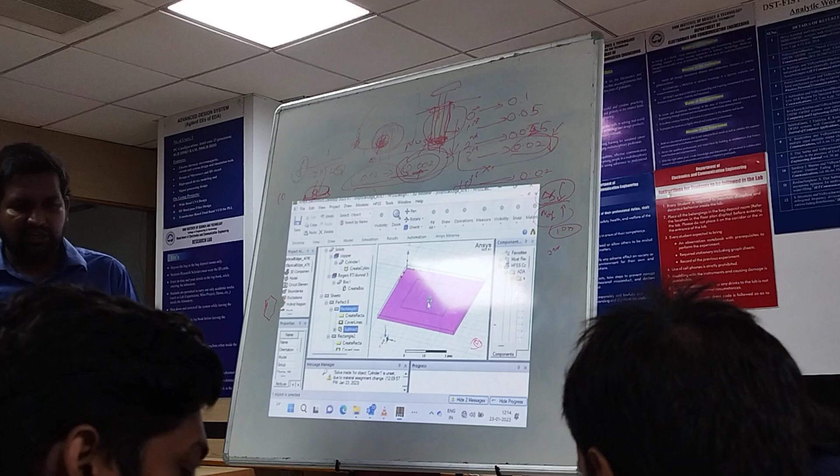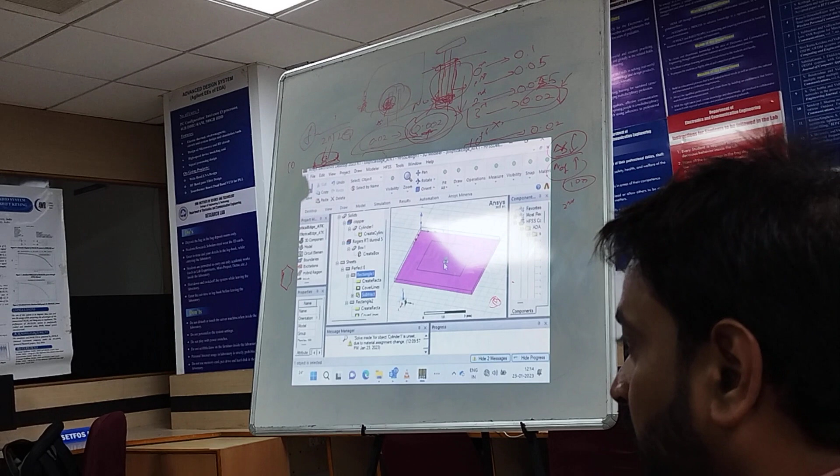That is a coaxial cable extent which we are taking, and this is our antenna. So this is the substrate part, this is the patch, and this is the ground. So from the patch I connected, this portion I cut. Some ground portion only you need, substrate also to cut, and then ground also. If you want to make it actually what it is, we had connected as a via here. Yeah, that's all, some kind of via.

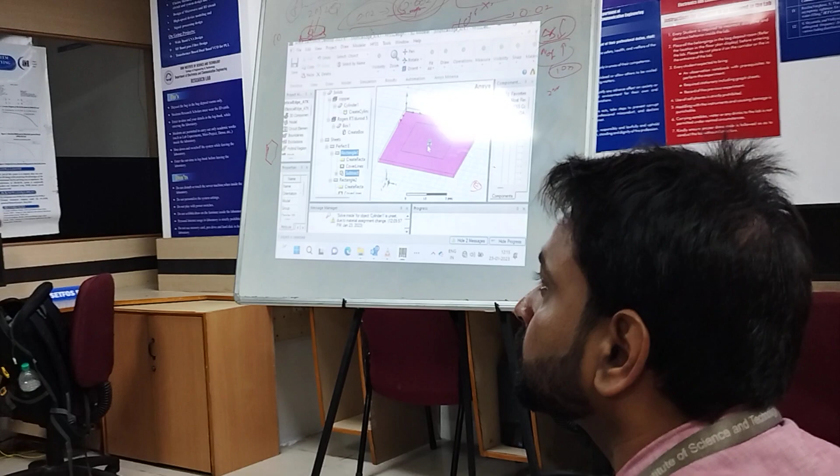If you want to make it as a whole and then you want to insert it, that is also fine. You need not do it with the computational software. If you place a cylinder in between, it won't be a kind of dielectric material in this particular cylindrical part. You need not to. I got your question. Because there is a gap, air is there, and air also has a dielectric constant, so it has to affect it.

Mostly how it will be is we will be just connecting SMA connectors. I got your point. In a practical case, when you are drilling it, it won't be exactly 0.1 mm. There might be some kind of gaps. If you want to consider that, you can do that also. The only aim is that it has to touch the patch. This is for testing purposes only.

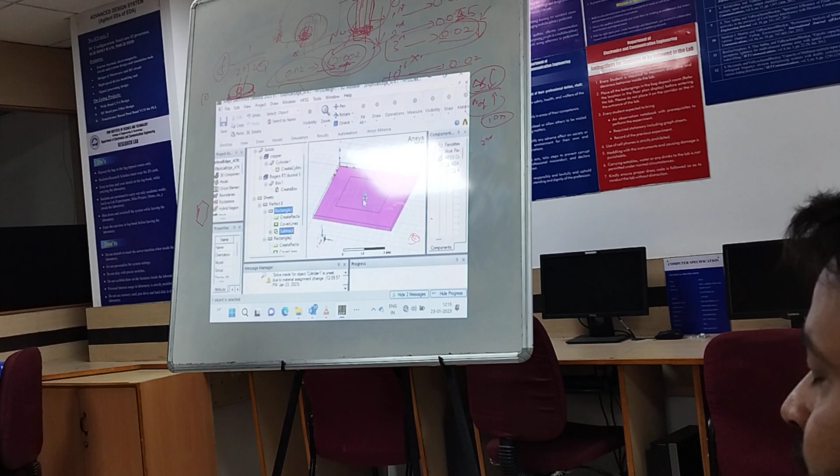For commercial applications we don't go for this SMA connector; we'll be using electrical ports. But for measurements we have to. Whatever soldering happens in the practical case, it is the point of contact. My ground should be in contact with the outer conductor. In SMA connectors, other than the inner conductor, whatever the body is, that is wholly grounded.

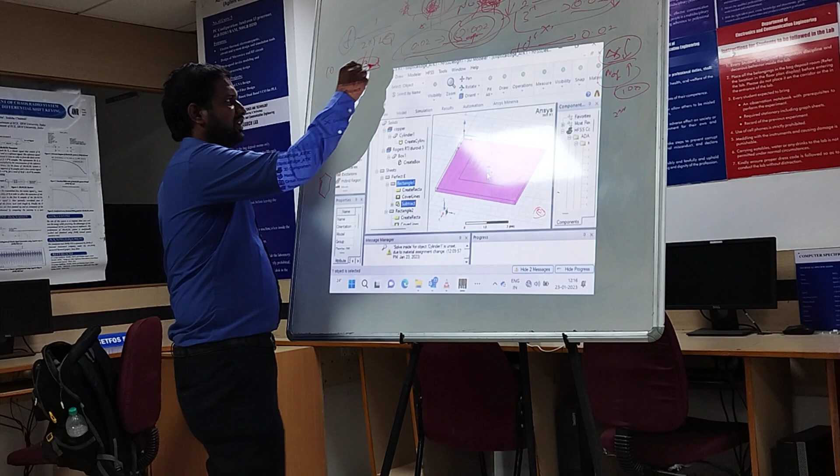In an SMA connector, if you see, it will be a kind of 4-pin, with the inner conductor, and here again a kind of cable. The inner conductor is the only part which has to touch my patch. This overall ground will be connected with the ground. If you solder this part with the ground plane of the antenna I am making, it will be connected. So the whole body is ground plane; only my inner conductor touches my patch.

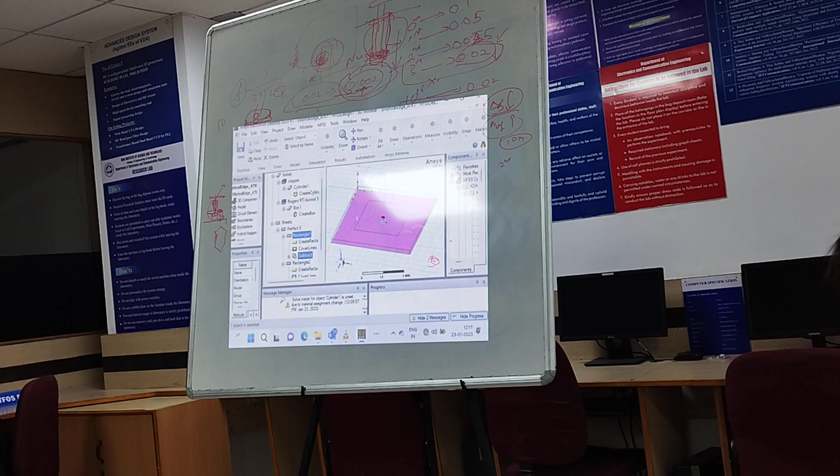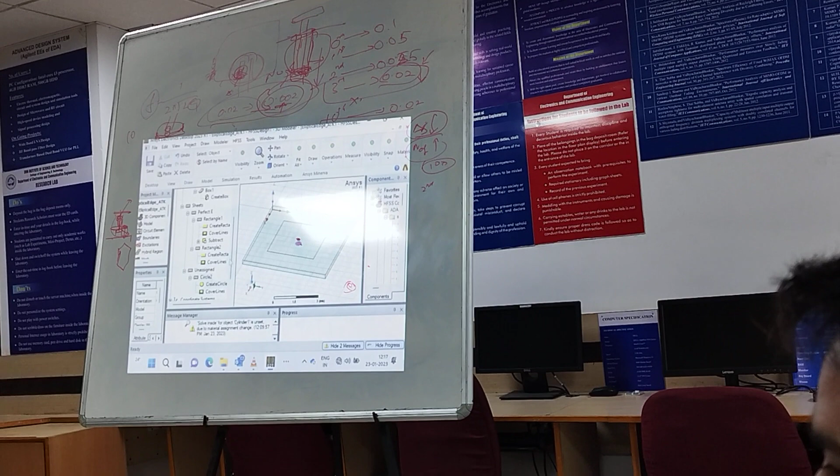So once you have made this, as I said, I will attach my excitation geometry at the bottom of the ground plane itself. For that, again draw. Go to circle. Draw it. You can make it 3, 0, and the radius will be 0.2, which is the etched-out radius. Click on apply and OK. So this is the first thing we made, and other than the excitation geometry, everything has been assigned. You can check it out here.

Just right click on circle 1, go to assign excitation, then ports. In your version you will get the lumped port option. If I were going with modal analysis, I would have gone with the modal lumped port. Here I have terminal lumped port, which is the terminal solution. In solution type I selected terminal, so I'll go for that.

So in case we don't use that SMA connector and we go for some electrical connection, discrete type, what port should we use? We have discrete port also. Discrete port is available. Circuit ports. So in that case we are using circuit ports.

Other than that, based on applications, we have different types of ports. Plane incident wave, for RFID examples. For plane wave excitation, like in a unit cell, we'll make a lattice pair boundary condition or master slave and analyze. Instead, if you want to analyze a metasurface, how a plane wave is interacting, how my incident wave is reflected back, or for RCS, radar cross section analysis, we can go with this.

So we are giving here waveguide port only. There is nothing much between waveguide and lumped port; both are similar kinds of port analysis. In wave ports, the PEC backing should be there. If it is a lumped port, we need not go for that. For a terminal lumped port, whichever is the ground plane, choose it as reference and click OK here.

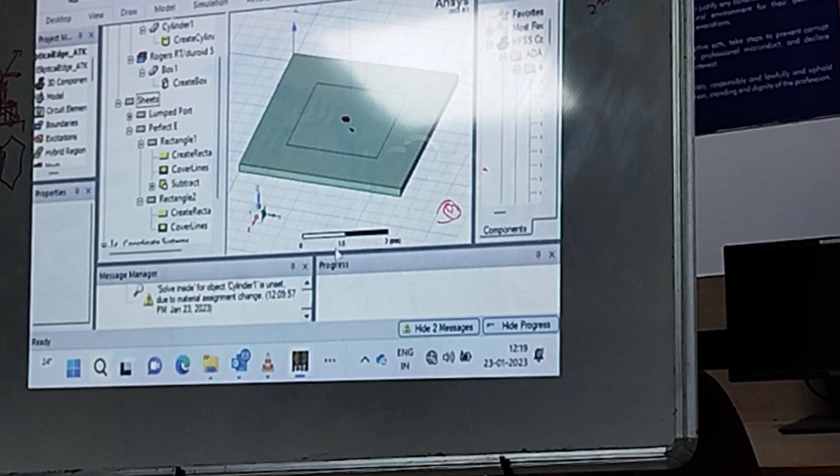So now we have created everything; only the boundary condition is remaining. To go for boundary conditions, right click on the layout and go for the create open region option. Once you create the open region, if you give the operating frequency here, based on that your airbox will be created automatically. Yeah, it will automatically create; we need not create geometry for it. For example, it is around 27 to 28 gigahertz. Once I click on it, the airbox will be created.

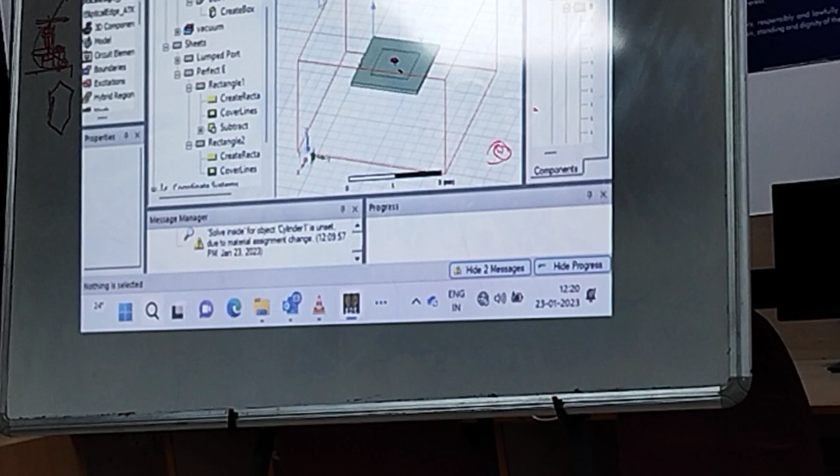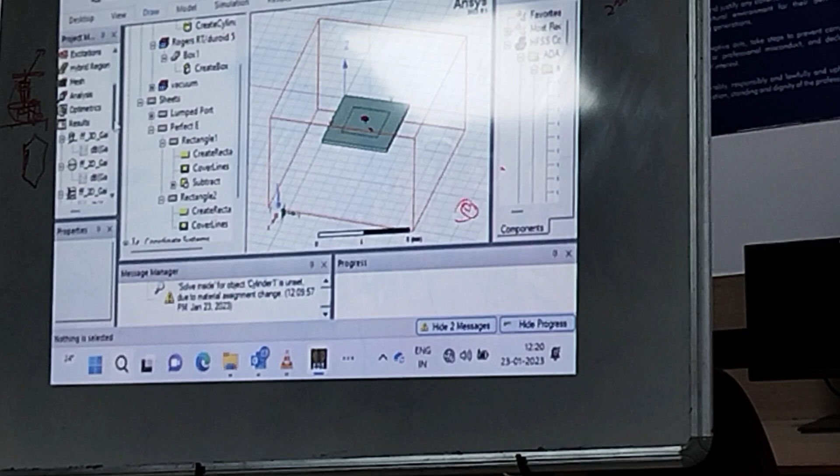So this is the overall procedure: the geometry creation, the 2D or 3D structure, what material we give to it, and that geometrical analysis. Now, the size of that airbox? Lambda by 4 in all directions. From edges or centers? From the edge, it will be lambda by 4. From the substrate, or if you are giving some thickness to the copper, from that copper face it will be lambda by 4.

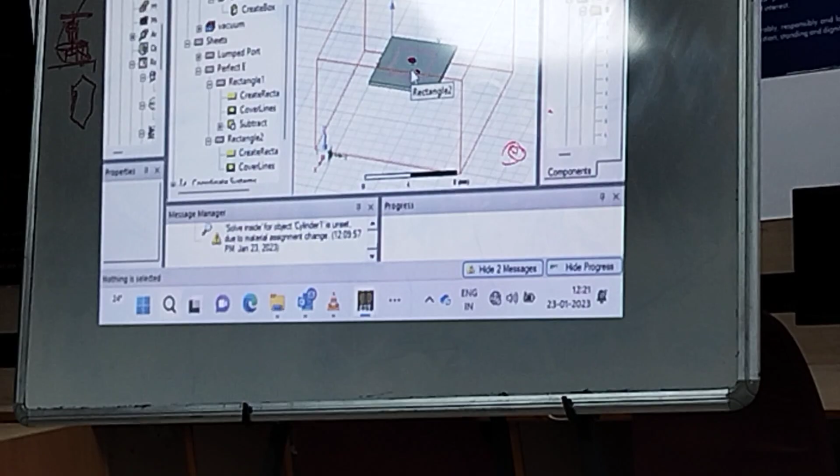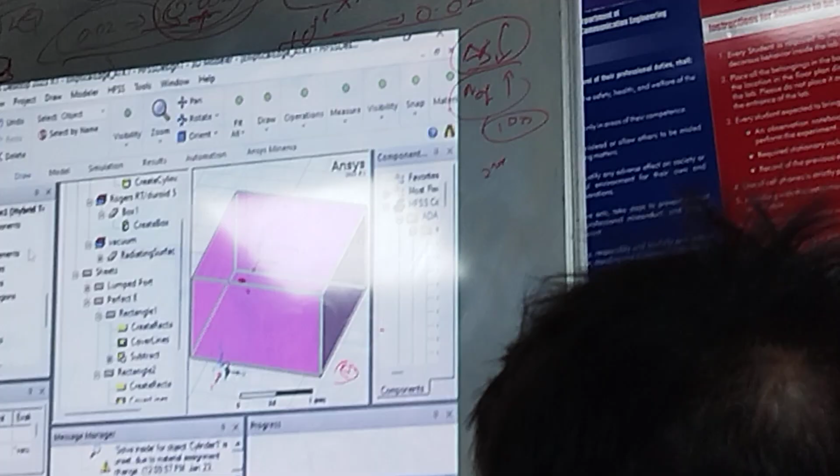So radiation also you can use, no? Radiation box. Yeah, you can create a different radiation box. So we design the box and we need to assign it as a radiating surface or something like that? No, automatically if you go for open region, instead of a radiation boundary condition, just the open region boundary condition will appear here. If you want to make a lambda by 4 box, you can right click and go for assign boundary,

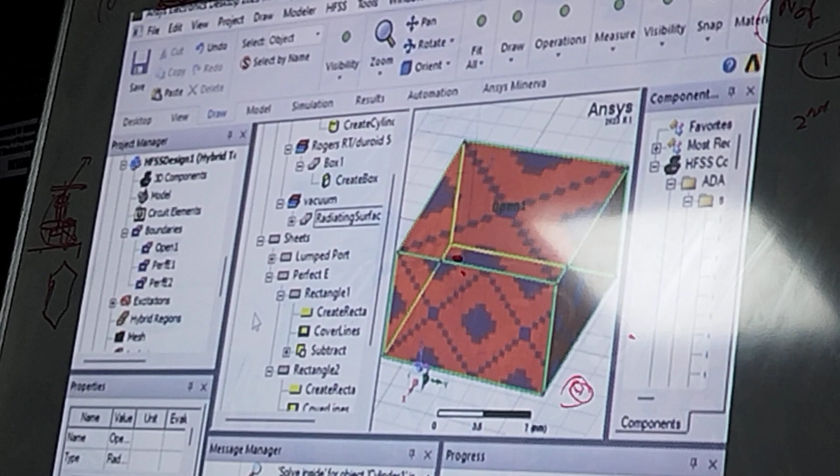either you can go in this way also. So if we want to increase or decrease that lambda distance, we can do it manually, right? Yeah. Once you have created this open region, you can go here and double click on this create region. Manually you can set how much it has to be increased in positive X. That also could be done.

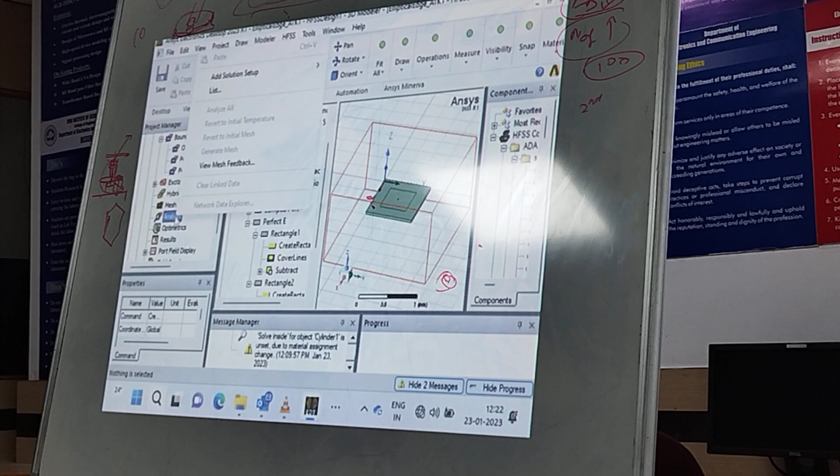Once you have created this boundary condition, the next step is analysis. Here we set the frequency range, the convergence rate, and the number of passes. Right click on analysis, go to add solution setup, go for advanced. Auto will take a range from 1 gigahertz to 10 gigahertz, wherever it recognizes it. If you are just creating your model, you can go for auto. In our case we will go for advanced.

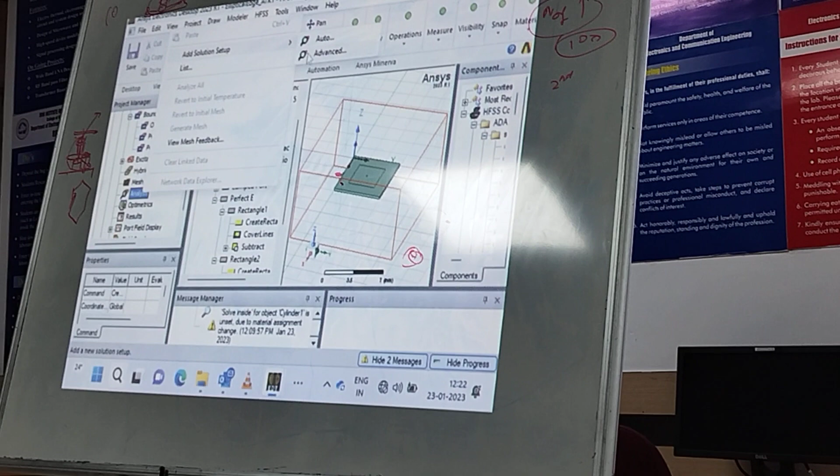Here we have 3 different solution frequencies: single, multi-band and broadband. In this case it is only single band we are looking for. So the frequency I am giving as 27 gigahertz, maximum number of passes 10, and maximum delta S value 0.02. In this itself I will show how adaptive mesh works based on field concentration.

In this particular case everything is getting reflected back. My field concentration will not be on the patch; it will be very minimal. So how many passes this takes, and how many passes when I exactly match it, how the mesh structure confines, we'll compare that to get a clear idea of what adaptive meshing is about.

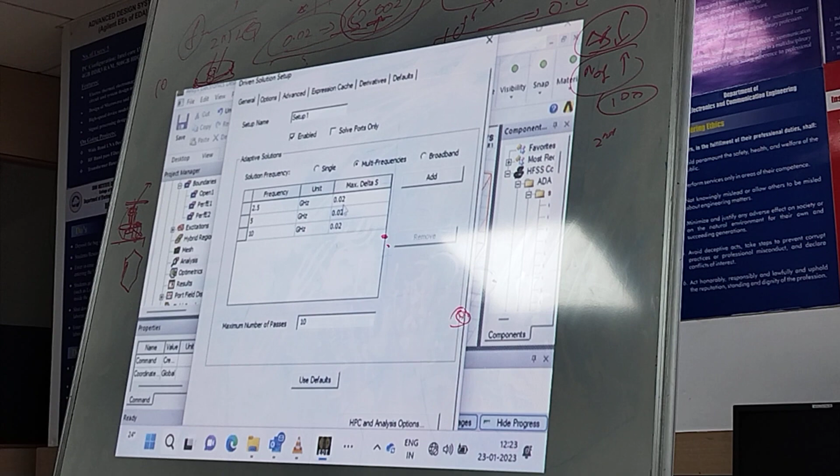So if we are going for multi-band antennas, we have to give multiple frequencies, right? Yeah, we'll be giving the maximum delta for each and every frequency. Sweep will come next. Is there any calculation for maximum delta S? Based on meshing structures only we have to reconfigure it.

It's not about calculations. Based on this maximum delta S, you can visualize how confined or how small the meshing structure is. If it is too large and not concentrating on any particular part, then you have to refine your mesh again: decrease the maximum delta S, simulate again and see. So it should be as minimum as possible? Minimum as possible, you can go for 0.03, 0.04. It takes more time to run? Increasing it takes less time; if it is decreasing, it takes more.

In some cases you might be refining too much, so whatever magnitude you are getting will be completely collapsed. But when you go for measured results, it will be a minimal value. In simulation you will be getting around minus 30 to 40 dB. So here, let's say maximum number of passes 10 and delta S 0.

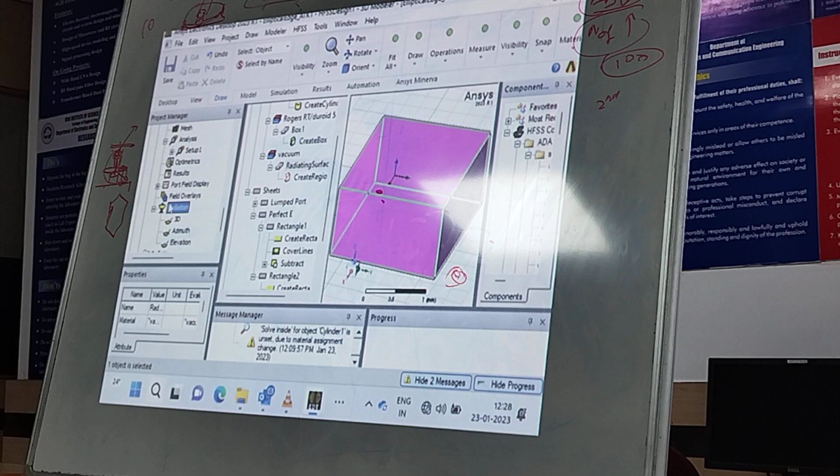Here, once we go for open region, we need not set far field radiation. We need not set anything. If you are not using open region, in this radiation option you have to go for far field setting, infinite sphere, you have to set it out here. If you are going for open region, automatically it will be set. So once we are done with this, we'll simulate and see.

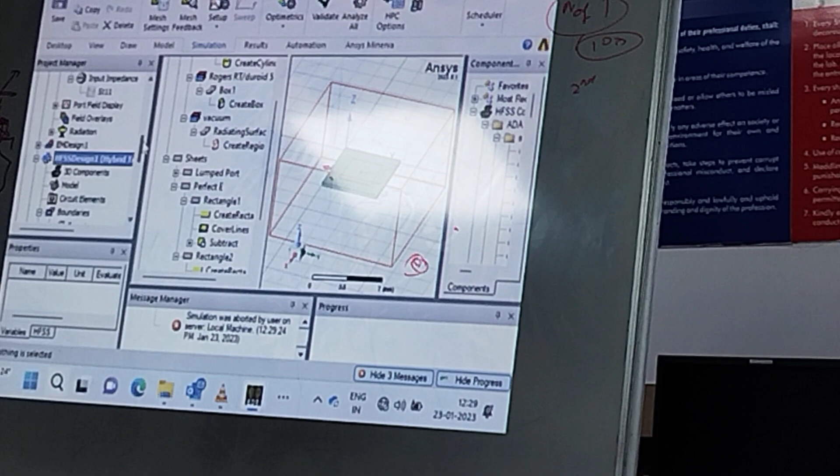So just to view how the processing is going, you can right click on this setup.

You can go to the profile option here. It will let you know how much time it is taking for the frequency sweep. Now it got completed. From the start, what the step frequency is, how long it is taking. All this data while running a simulation — for a smaller simulation it is not much needed. When you are going for large simulations where cores are much needed, at that time you can do that.

And convergence: you can see in the third pass itself, my simulation got completed. And here is the convergence rate we attained. In the initial case, the number of elements or tetrahedral structures created was 13,396. Then it increased the number of structures based on the field. Then it saw the convergence rate, which is 0.03, which is greater than my target value. And in the third iteration it got it, and the simulation stopped.

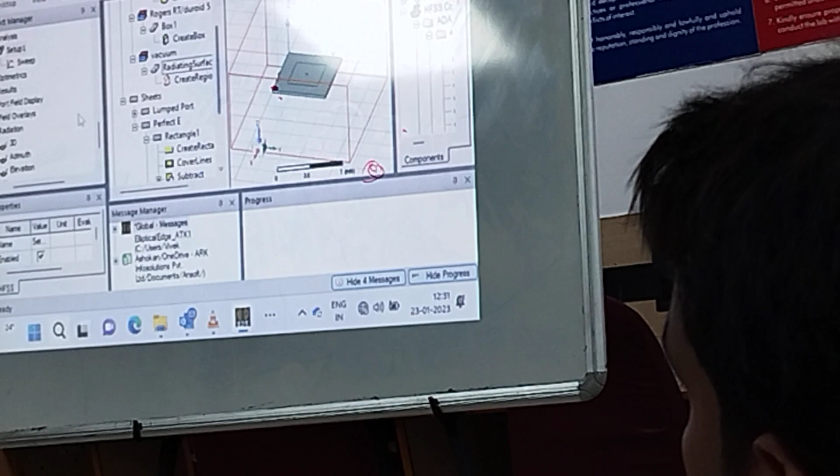But the number of passes which I gave was 10. Within 3 itself it got completed. Why? Because my target value was already achieved. Okay. So this is one case. Now if I go and see the reflection coefficient, it will be mostly fully reflected back because of impedance mismatch.

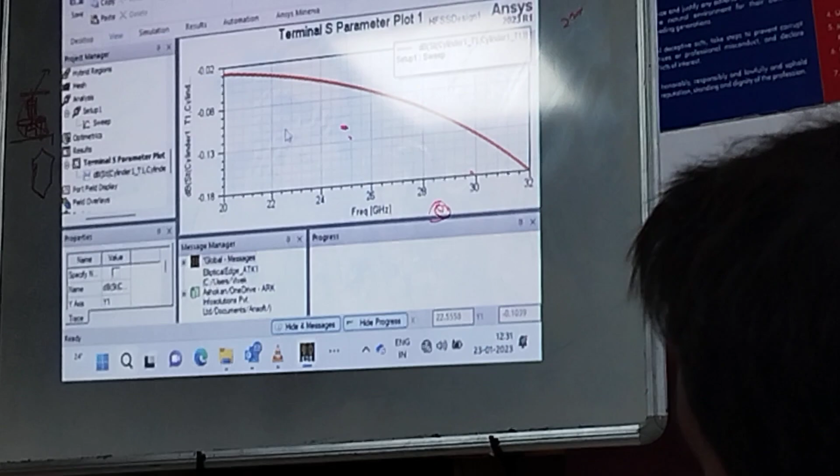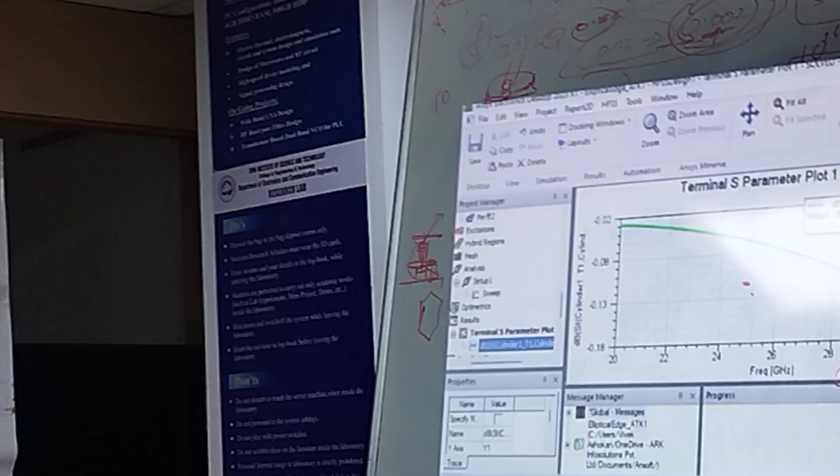So I go to results, right click, go for terminal solution, rectangular plot, then just click on new report. Whatever I am sending here, it is nearby 0. Whatever I am sending through the port, everything is getting reflected back. Nothing is transmitted to the radiator. So this is S11 only, no? Yeah, it is S11. This is S11, for the cylinder structure which we had kept. This is nothing but the reflection coefficient.

Let's suppose I know the position here, which is around 0.6 mm from the center. That will be the matching position. So I'll introduce a parameter here to change the overall system. So position X is the position of the feed, right? Yeah. Position X is nothing but the change of position from the center to the exact feed location where impedance is going to be perfectly matched. It is asking for that. I will give it as 0.6 mm.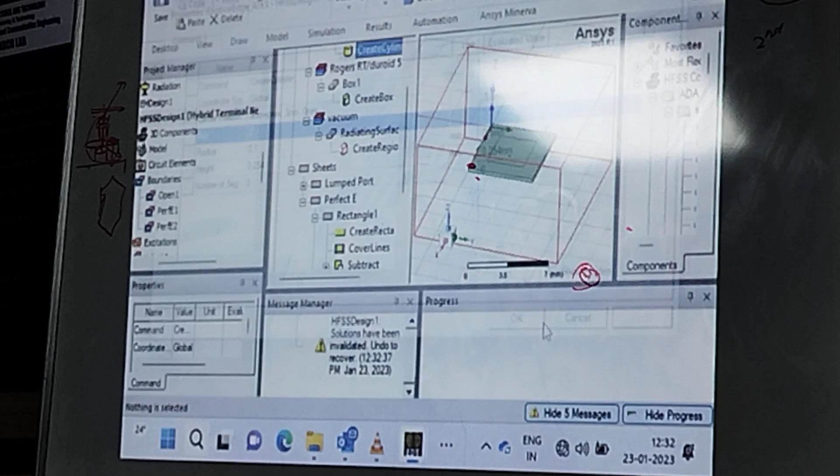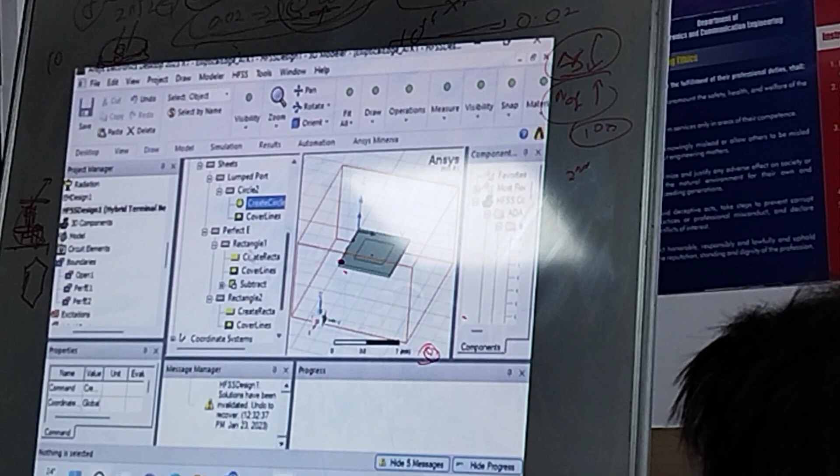In this particular excitation system, I have three components to be coupled together: my inner conductor, the dielectric region, and my excitation geometry. So we need to change everything over here. If I had used variables, I could have just changed it directly. The first inner cylinder I changed. Then I go for the lumped port, which is my port geometry: 3 mm plus position X. The same way, the dielectric region where I had subtracted circle 1, here also I include 3 mm plus position X. Click on apply and OK.

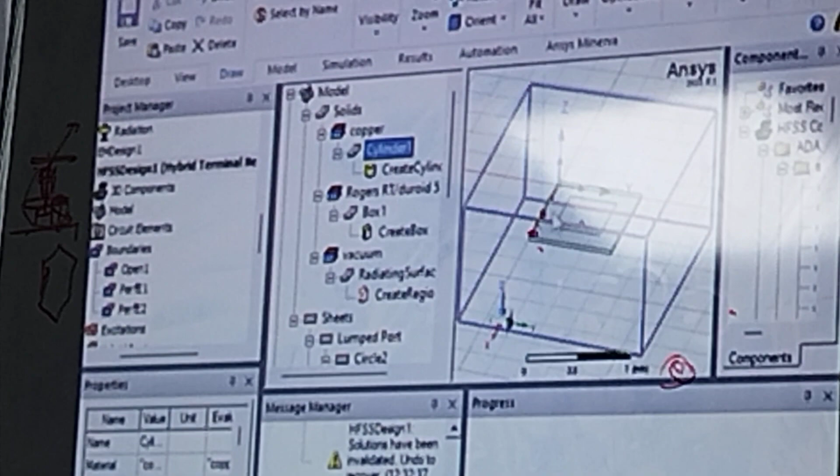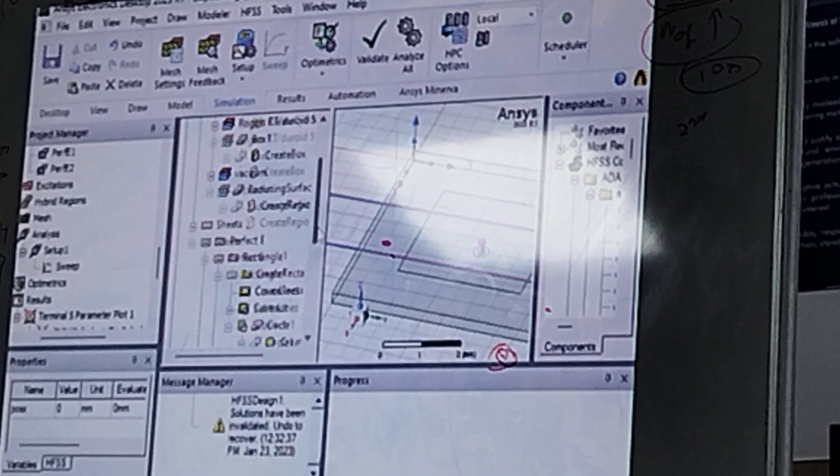You can see here the overall system once you zoom in. Based on the input, let's suppose I make it 1 mm, the whole system should move together. Let's suppose it is 0.6 mm as I said. We'll run the simulation and see how many passes it takes. Initially I'll make it 0. And let us first plot the mesh here and see how it looks. Here itself we can do the parametric analysis and find the feed position exactly. I suppose this is my rectangle one. We'll plot the mesh here.

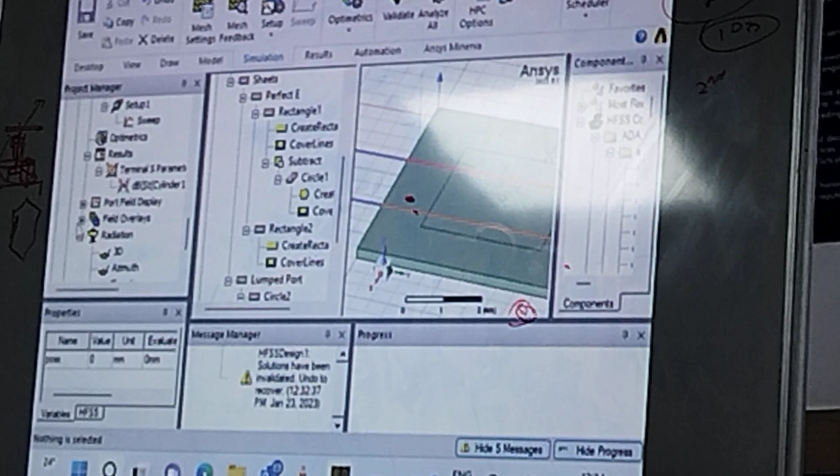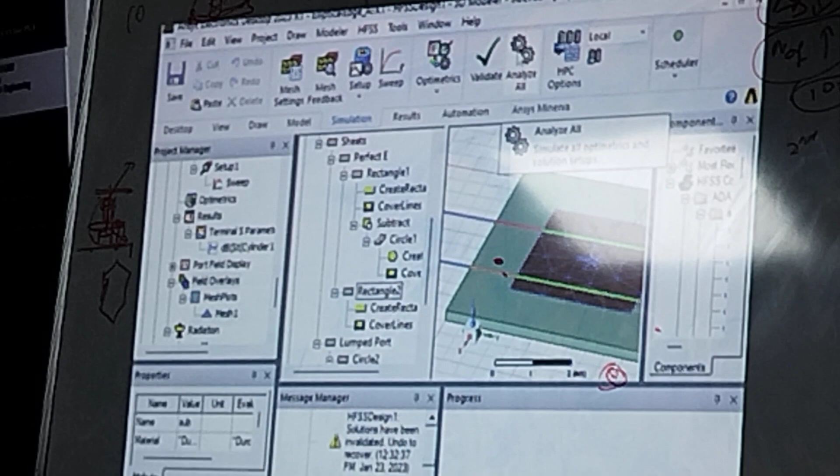In field overlay, whatever fields you are making, we just need to run the simulation. As I included a new parameter, it is not taking the old solution. So it will delete the old one, and you can see here how the meshing increases for each pass. So this is how the mesh looks. Wherever my field concentrates more, like here where it interacts, in that particular area it is trying to confine.

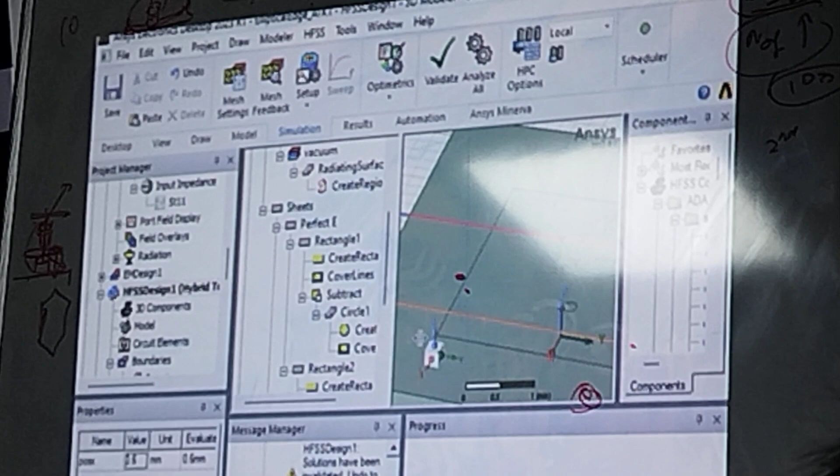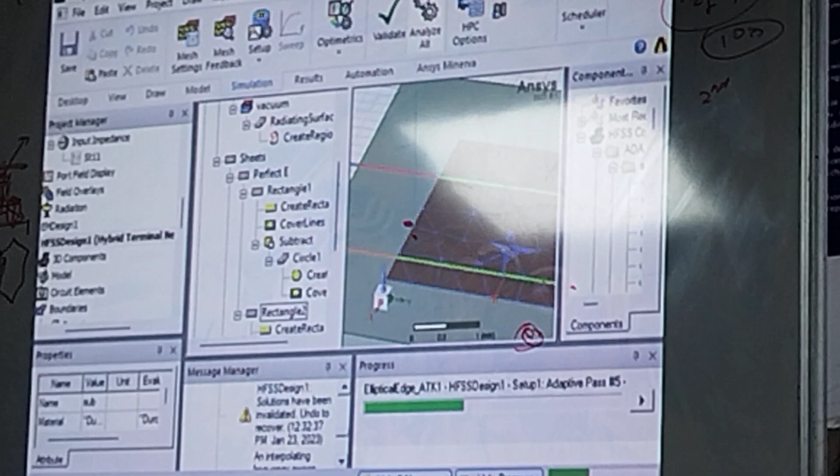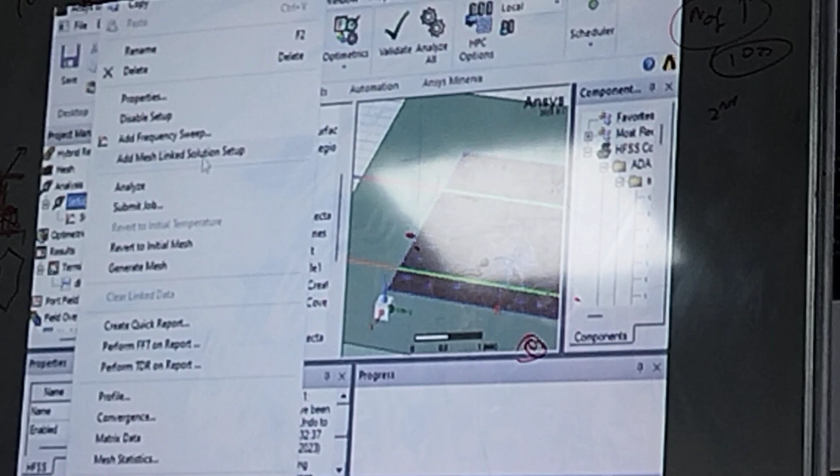But let's suppose I change the position here from 0 to 0.6 mm. So let us run this. In the earlier case the computation was done in the third pass. You can see the number of mesh elements is increased compared to the earlier one. And in the profile, if you see, it went beyond 3 passes. At the 10th pass only we are attaining that, and the number of tetrahedral structures used is 11,000. This will define my accuracy.